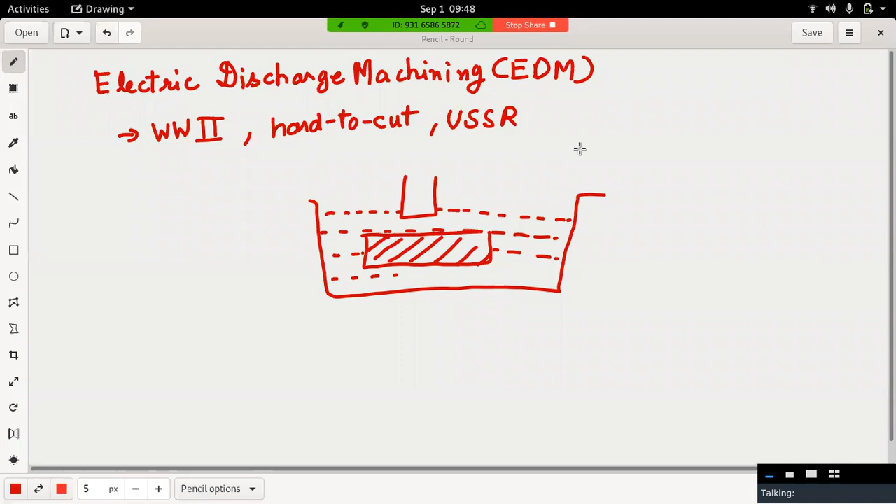So in this electric discharge machining, there is a tool, and then there is this workpiece, and both of them remain submerged into a dielectric fluid. So in ECM it was electrolyte, and here it is dielectric. Okay.

So dielectric fluid is a kind of fluid which, upon having enough electrostatic field, gets dissociated into electrons and ions. Okay. And it is a very good conductor of electricity. So during the operation, if you touch this fluid, you may get shock.

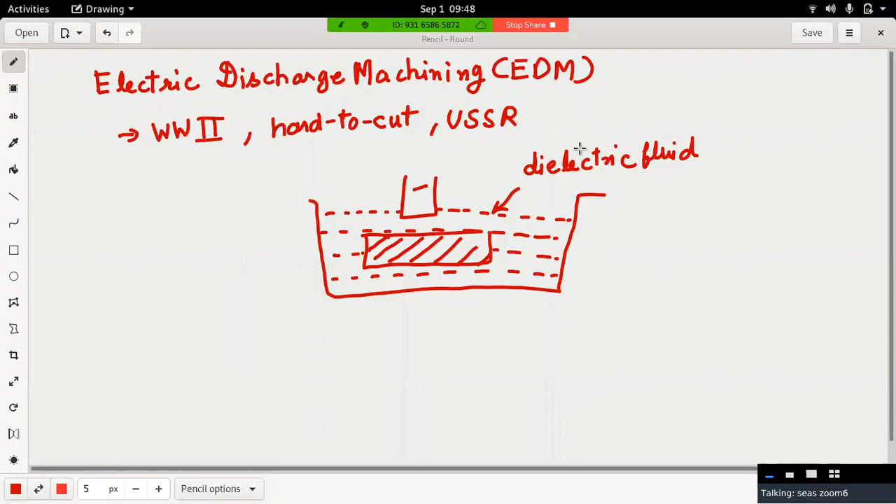Okay. And here the tool generally remains negative, and the workpiece generally remains positive, and both of them are given electrical charge. So it was observed that when there is enough voltage or enough electrostatic field between tool and the workpiece, then from the tool, electrons start to flow towards the workpiece.

However, these electrons flow at a very high speed from cathode, that is the tool, to anode, that is the workpiece. And you must also remember that we are required to remove the material from the workpiece. That is the reason why we have taken the workpiece as anode, because it was actually observed experimentally. There are very few fundamental bases why the material removal takes place in larger amount from the anode when compared to cathode.

So it was basically found that when we use the same material for workpiece as well as tool, material removal from the positive terminal was more than the negative terminal. Okay. Anode was found to wear more when both the materials were same. Here also both the materials are electrically conductive, and it was found that the material deteriorates at the positive terminal at a very high speed.

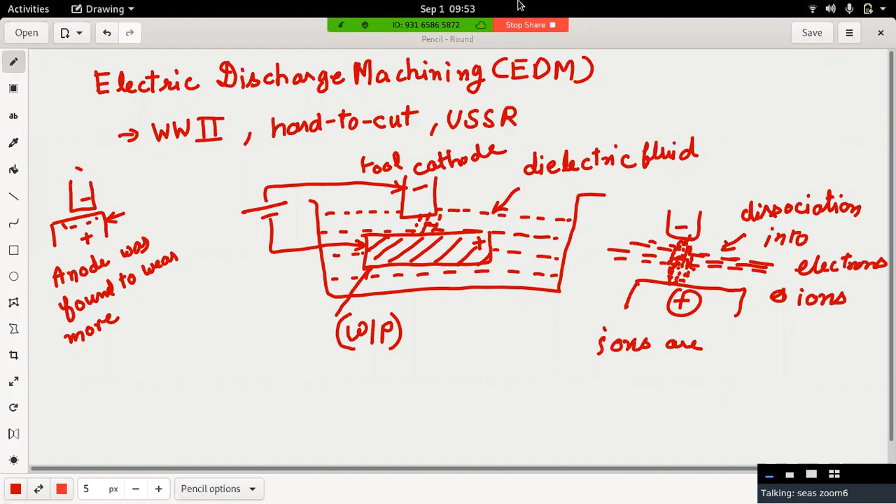So basically you can say that there is an avalanche of electrons through a narrow tunnel made by ions. And the spark happens because there is some gap which is called a spark gap. So there is a gap between tool and the workpiece, and this gap is called spark gap. So this is the spark gap.

Spark gap determines the intensity of electrostatic field between cathode and anode. Okay. If a spark gap is very large, a very large voltage field is required to be maintained. If a spark gap is too low, so that the ion tunnel doesn't get formed, then there will also not be any spark.

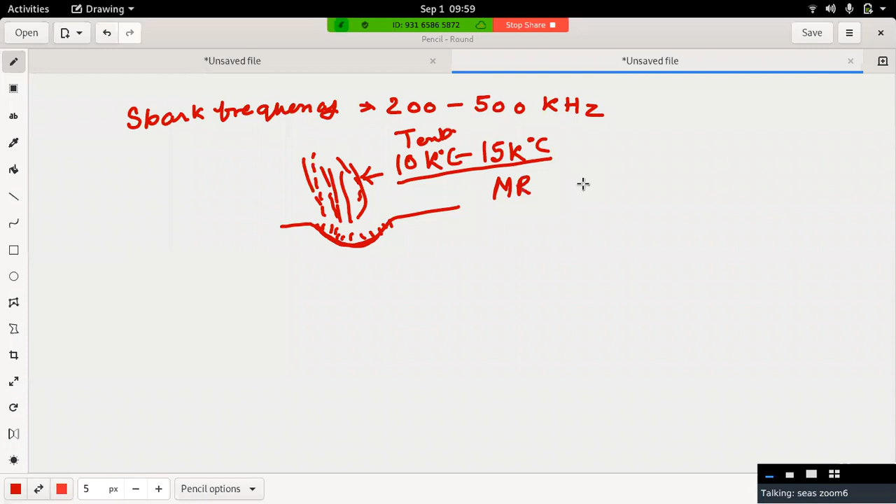So there is melting and vaporization which occur at the surface, and because each spark has a very small dimension, the material removal can be controlled very precisely. If we can control the number of sparks, we can also control the material removal rate. So MRR is controlled by the number of sparks. The voltage gap generally remains in the order of 30 to 250 volts.

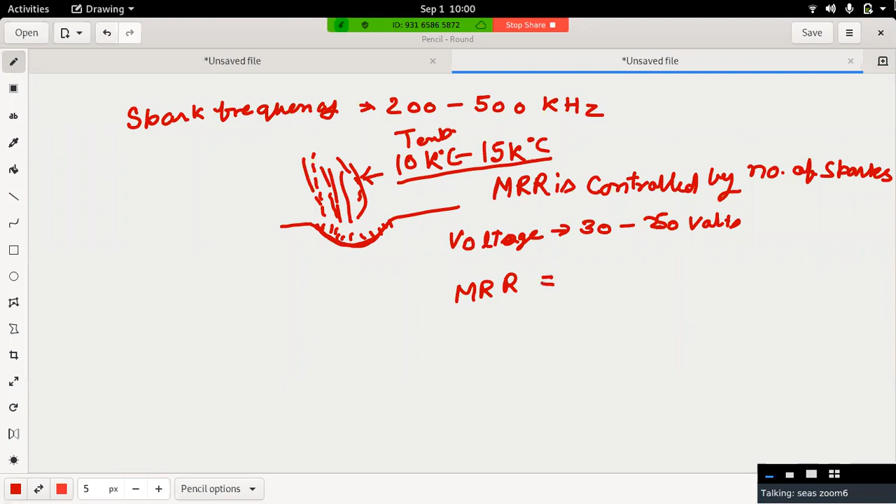And although it depends on the kind of material, in general it was found that material removal rate can be obtained up to 300 cubic millimeters per minute. That is sufficiently large, although compared to other processes this may be a very small amount, and it depends which kind of material we are using and which voltage gap we are applying. Because I have seen people using EDM and doing experiments for days, 2, 3, 4 days. The experiment continuously goes on for a very small amount.

So material removal rate is not a very good factor to compare in case of EDM, because the material removal is very precise. So when precision is required, MRR becomes secondary. However, when we have to remove the material in bulk, it is not suggested to use EDM.

In order to maintain the distance between tool and workpiece, several kinds of devices can be used. Sometimes they use servo motors, sometimes stepper motors, sometimes even a solenoid valve can be used to maintain a precise gap between tool and workpiece. So this machine involves a lot of electrical circuits, not only for maintaining this gap, but also for generating enough voltage gap. There are a lot of circuits available, like the RC circuit, and a lot of capacitors are used. So the electrical part is too heavy for this kind of machining.

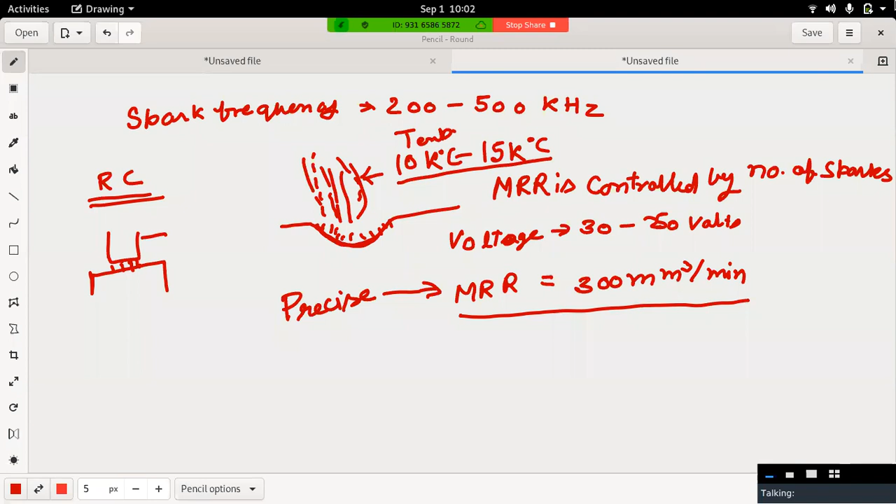Why does the positive terminal erode faster? The positive terminal erodes faster. It was experimentally found, and there is no theoretical basis for this phenomenon, but still a few theories are available, which say that the momentum of the stream of electrons which strike the positive terminal is much more than the stream of positive ions impinging on the cathode.

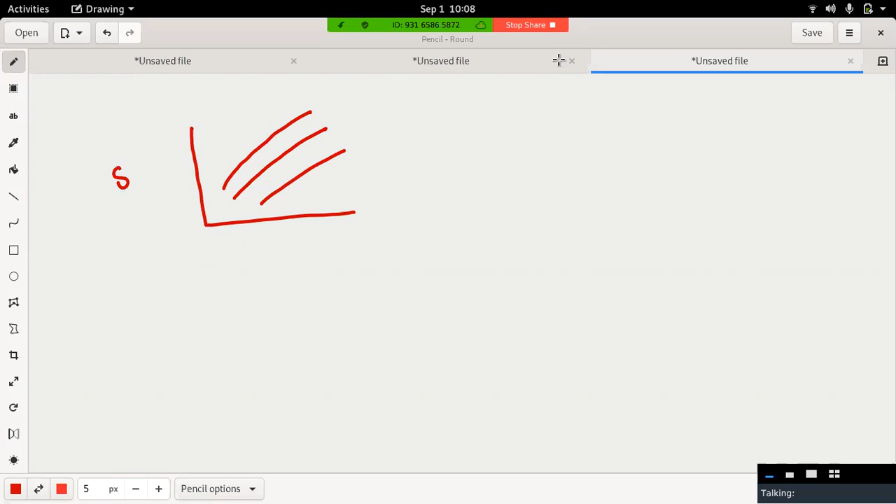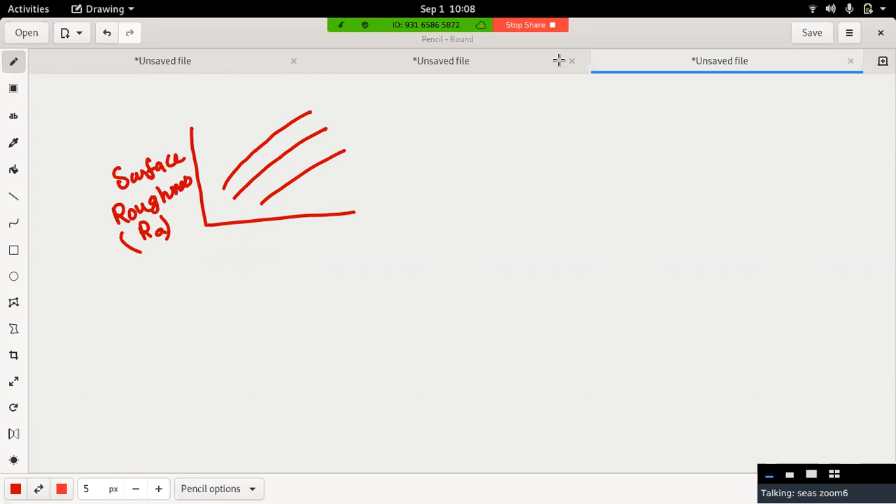So the crater size, which actually depends on energy, controls the quality of the machined surface. And again, this energy depends on the voltage gap. So if I try to plot a curve, this is voltage gap versus, on the y-axis, surface roughness. I'm just talking about an average surface roughness, Ra value, and here voltage and capacitance. Okay, both are interrelated.

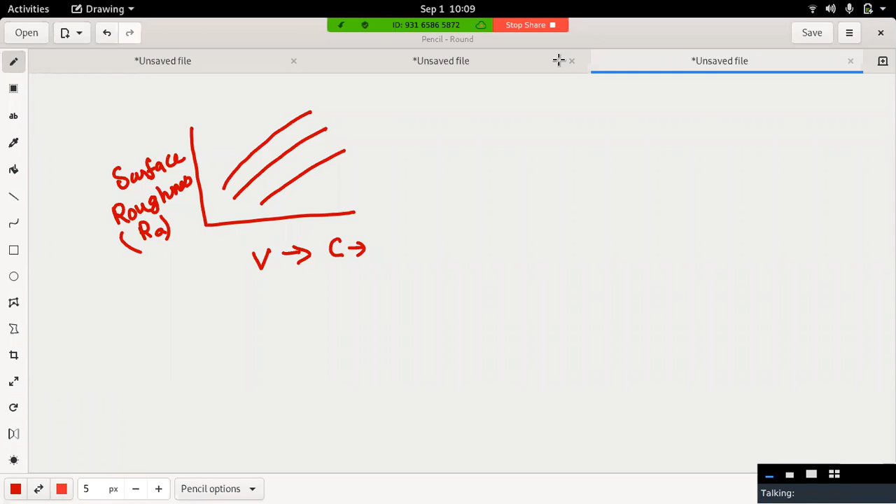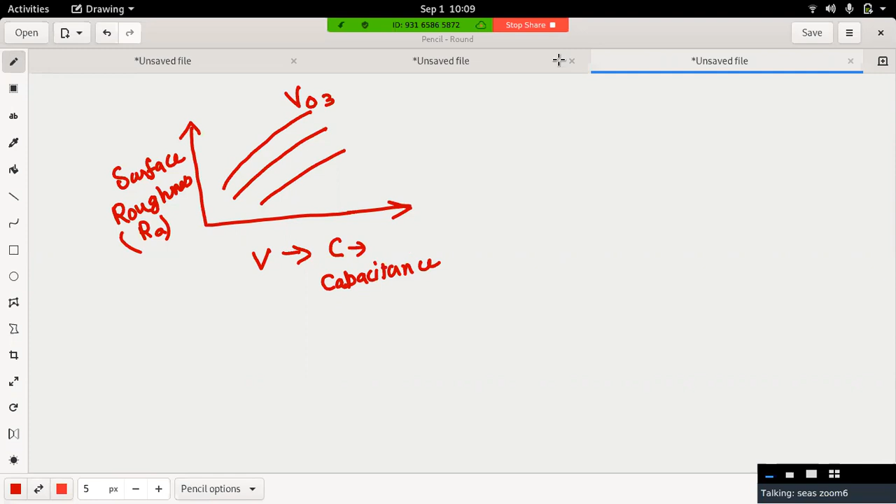So let's say this is V03, that is the voltage gap, this is V02 and this is V01, and V03 is greater than V02, which is greater than V01. So if the voltage gap is large, upon increasing this capacitance, the surface roughness will increase because at the higher voltage or higher energy deposition, the crater size is large. So we are required to keep our voltage gap at an optimum value so that proper surface finish can be obtained.

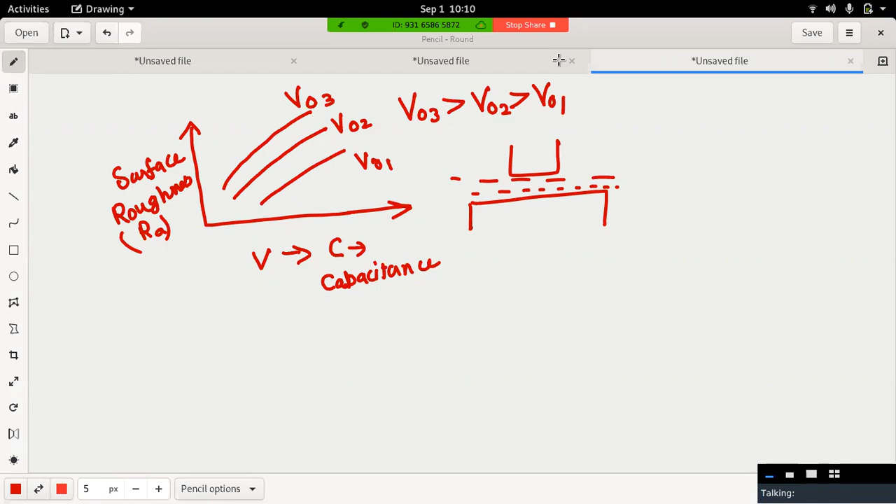Also, not only this, the flow of dielectric between tool and workpiece is very important. We can give a simple, natural circulation, or we can also give a forced circulation in which the speed of the fluid remains very high. And it was found that when we give this forced circulation, the surface finish remains good. Okay.

The reason can be said that they flush away very small particles generated from the crater, and if they flush away in a very efficient manner, then the spark generated each time at each point does not get distracted or get any hindrance, and therefore each spark is clean. Okay, so that is why it was found that forced circulation produces better surface finish.

Although this forced circulation requires some extra energy, we must, during the calculations of energy, if it becomes important, keep in mind that this forced circulation is associated with some kind of energy consumption, which actually in terms of energy reduces its efficiency. So it depends whether you want to invest less money on the energy or you want a better surface finish. So again, it is all about an optimization problem.

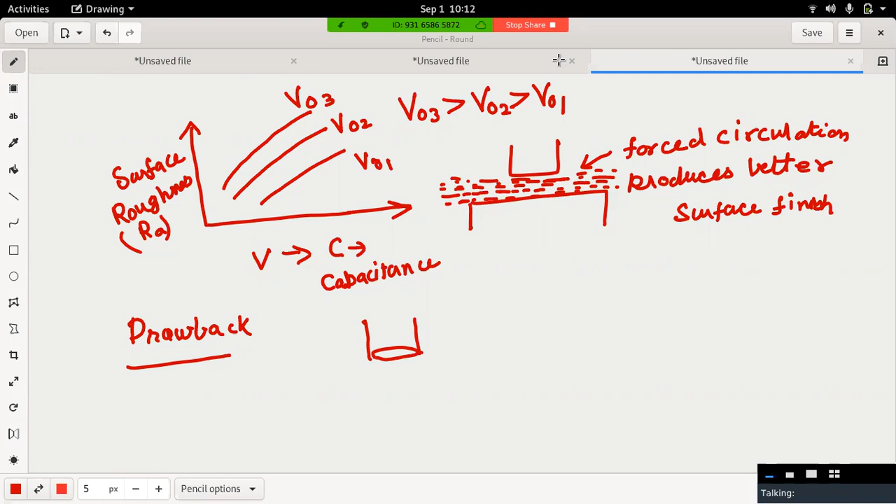There are some major drawbacks. One major drawback of this process is taperedness. For taperedness, let's say you have a cylindrical tool and you need to make a hole in the workpiece using this cylindrical tool. As the tool is fed towards the workpiece, a crater gets formed at each point. Now see, material removal takes place at the tool as well as the workpiece.

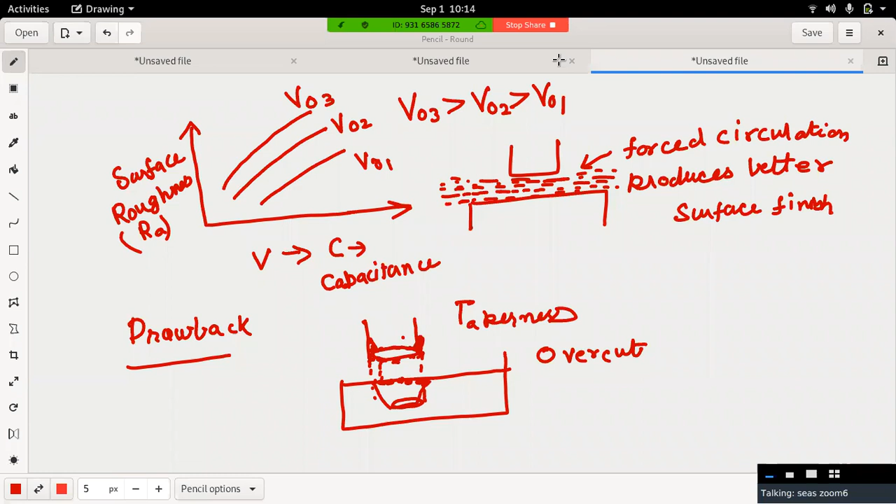So the magnitude of this overcut is dependent on the spark length. So the spark is of whatever length, and how much crater is being formed on each surface.

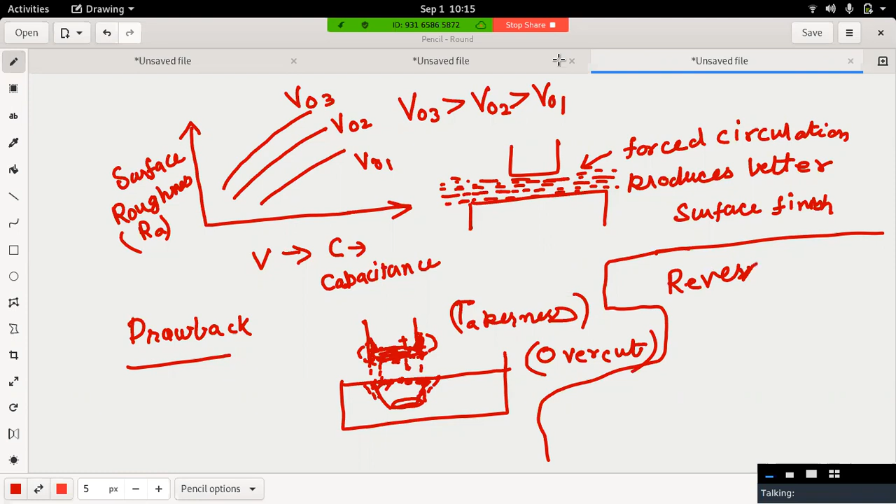So every part of this tool is subjected to some kind of crater producing site. Okay. And so there are two major drawbacks. One is taperness, another is overcut. A slightly variant process of EDM is called reverse EDM. Reverse EDM is nothing but when we just change the polarity of the tool and the workpiece. Initially we took the tool as negative and the workpiece as positive. If we change this and make the tool positive and the workpiece negative, then this kind of process is called reverse EDM.

And in this process, the material removal takes place on the tool side more when compared to the workpiece. Okay, and so some intricate designs can be formed on the cutting tool which are not possible with the help of other existing processes. For example, if we want to make a tool like this,

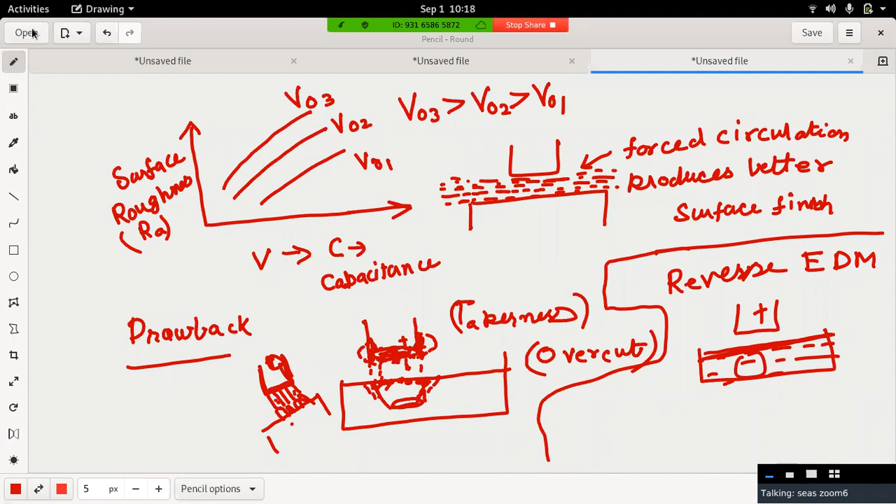So every time you need to design a new tool for every process, and tool wear happens, so the overall process becomes very, very costly. So tool wear is a very big problem. Let's talk something about dielectric fluid. The most common dielectric fluid which is used is kerosene or some hydrocarbon oils. Okay, which should have very low viscosity. So low viscosity helps in flushing away the burrs or the very small material which has already been removed.

And also, because it is subjected to a lot of heat, it should not produce toxic vapors. Okay. It should not react with any of the surfaces. It means that it should be chemically neutral. Also, it should not burn, or it should not produce flames. So this is also important. So you can just write absence of inflaming tendency.